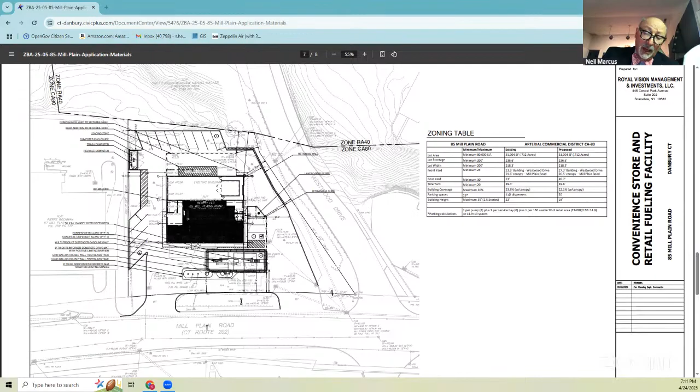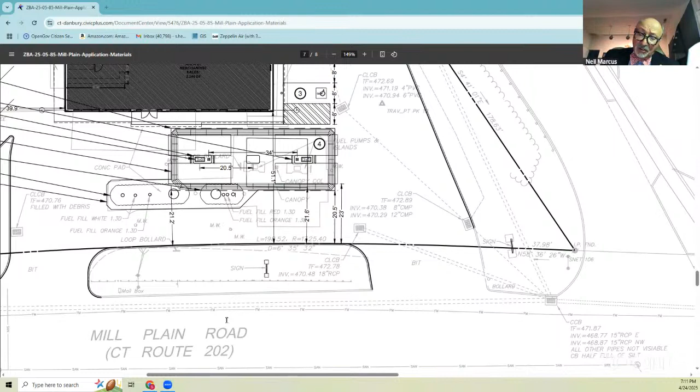So it's non-conforming. The new canopy will be 20.5. But the reason the new canopy will be slightly closer to the front yard is that the expanded canopy will cover the containment grooves. Containment grooves are installed today, and they didn't exist when that island was originally constructed. But the containment grooves are part of the new fuel vending island, and they protect the environment from any leakage from the pumps.

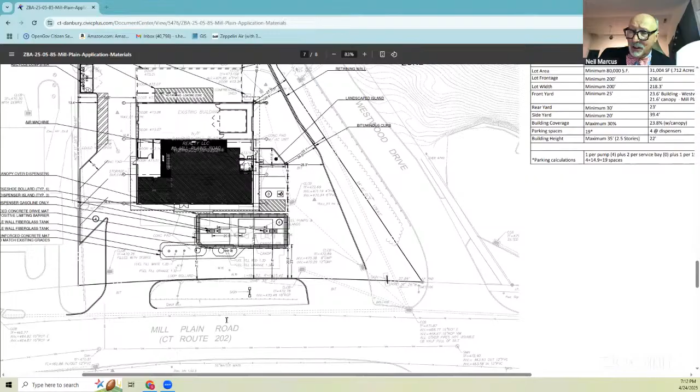So basically, if you're pumping fuel and you have a spill out of your tank because you didn't shut it off, or the automatic shutoff didn't go off, whatever, you had a spill, the gasoline today would run over the pad and out towards the street. It wouldn't be contained at all.

The modern new installation will have containment grooves, and these are only effective if you cover them from the rain. In order to protect the environment, remember in the Class 2 watershed for Kenosia, we have to upgrade to the most environmentally efficient vending island. We want to put in these containment grooves, but they're ineffective if we don't extend the canopy over them. So the reason the canopy is going to be 20.5 feet instead of 21.6 feet is to allow us to cover the containment grooves.

That's an increase in the current nonconformity by 1.1 feet, but it's done for purposes of making the site more conforming in the environmentally sensitive area. So on one hand, we're picking up 1.1 feet more on the variance than is currently required, but on the other hand, we're putting in an environmental feature that doesn't exist and should, because it's in the watershed protection area. So that's the first variance.

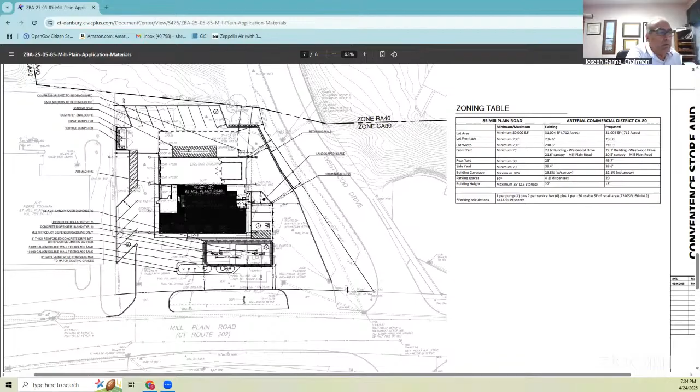Okay. Any other questions from the board? Yes, Mr. Marcus, I have a question. The retaining wall opposite of Mill Plain Road, that's a pretty steep slope. How high do you think you have to go?

With that retaining wall that runs parallel to Westwood - no, gotta be the west - opposite Mill Plain Road, where all the parking is in the back of the gas station. Hang on a second. Because I know that hill gets a lot of water, and I was wondering how you're going to manage it. And I know it has to be.

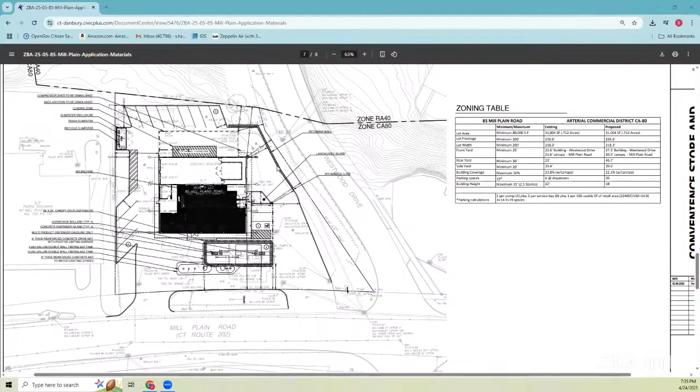It seems like a big deal, and I see that your closest parking spot to the line there is pretty close. Which parking area are you looking at? Opposite Mill Plain Road, the other side of the property. Okay, so there are 9 parking spaces along the north side. Correct. And those will need a retaining wall, am I correct? No. Where's our engineer?

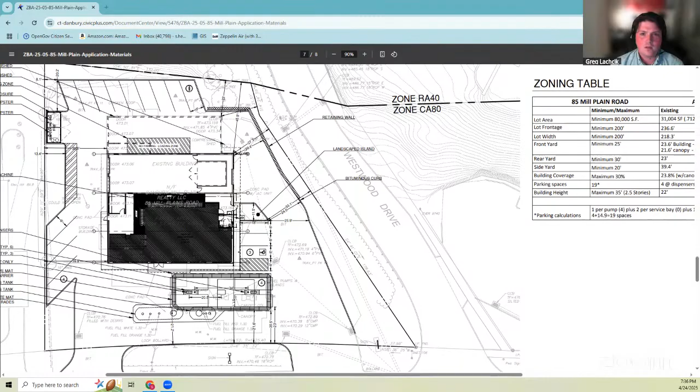Greg, what do you think? Yes. Hi, my name is Greg Lachcik. I work for Alfred Benesch and Company, and I'm representing our client, Sammy Jamal. If you allow me to share my screen, I can pull up a grading and drainage plan which shows the elevations right here. Okay, can everybody see this? Not yet. And it'll come - yeah.

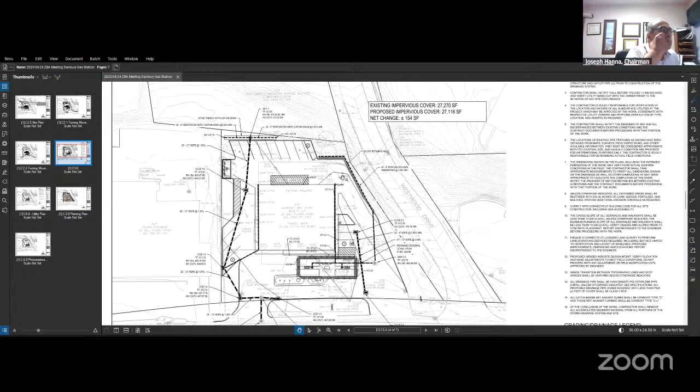Okay, so right here we're at about elevation 474, and our closest elevation to the wall is going to be about 482. So the retaining wall will be about 8 feet tall at its highest point in this corner.

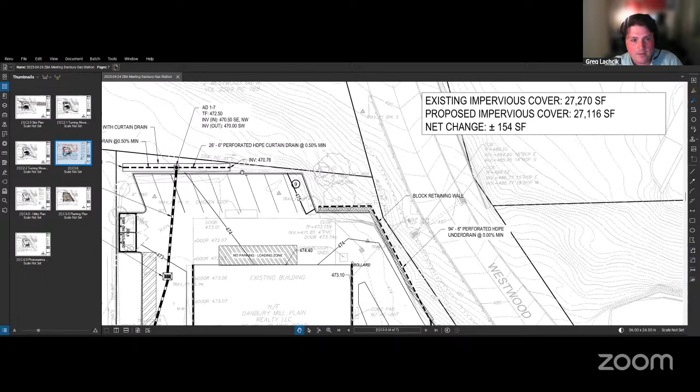The existing grade will slope down into the corner here, and there will be no retaining wall required on the back side of the property, on the northern side. We will also be demolishing the existing retaining wall located approximately in the same location abutting Westwood Drive, and it'll be extended further up on the northeast corner of the property.

We will also be including an under drain, which we are not sure is currently existing, that will help with any drainage issues associated with the wall. Additionally, all retaining walls constructed in the state of Connecticut need to be signed off by a licensed structural engineer, which will be provided prior to construction.

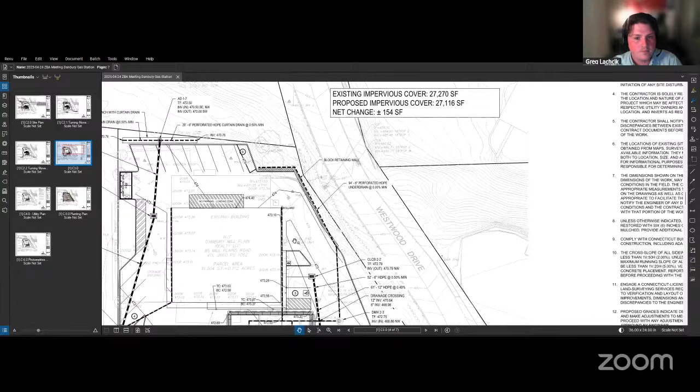Thank you, Greg. But are you saying that behind all of those 9 parking spots, there's no need for any kind of drainage or wall, or is that what I'm looking at there?

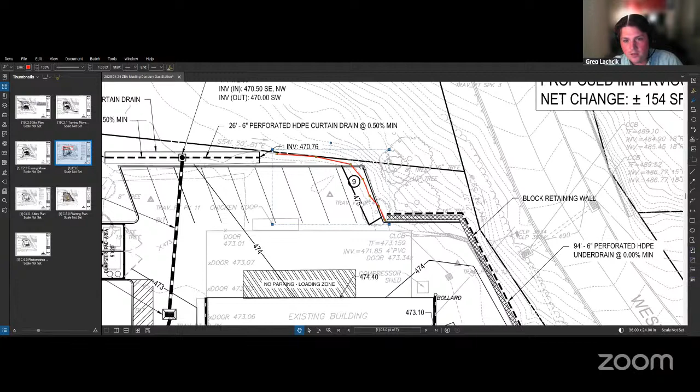A curtain drain? Correct. So this bold line here, that is our 475 contour, and our new 475 contour will be here, leaving this corner at approximately 475.25, which will allow us to not require any retaining wall there—potentially a 1-foot curb instead of a 6-inch curb. All those details will be ironed out prior to construction, but there will be no formal retaining wall around this back edge.

All right, thanks for your clarification. No problem.

Okay, any other questions? I have a few questions to follow up on the parking there. So with the new contour line, we're basically saying that it's borderline into that parking spot, about 90% it looks like.

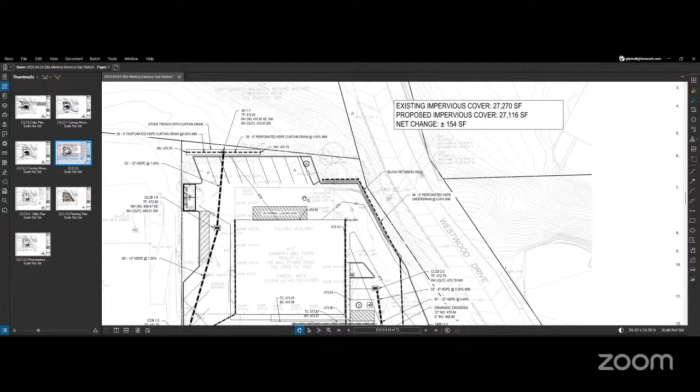I don't know, I would have to look into the regulations and maybe Sean can opine on this. Would eliminating that parking spot just be a little bit safer instead of taking the risk and adding that parking spot there?

There should be no risk to safety or slope stability that this parking space incurs. If we need to, we can provide some kind of geotextile slope stabilization. I don't see any issue why we would need to remove this parking space, as we're essentially matching the existing grade at the top of the curb at the corner in this location.

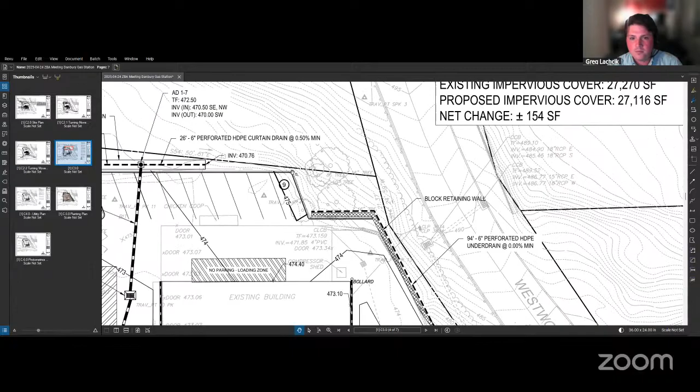And then I have a few more questions for Mr. Marcus. Yes, sir. With you asking here for 7 variances, I understand the need for—you're making this a lot less non-conforming than what it is now.

One of my biggest concerns is the two-way traffic you're requesting for that variance on the 24-foot driveway where it narrows down to 20 feet, with the Mill Plain Road traffic we currently get, and there being a stoplight at the intersection of Westwood and Mill Plain.

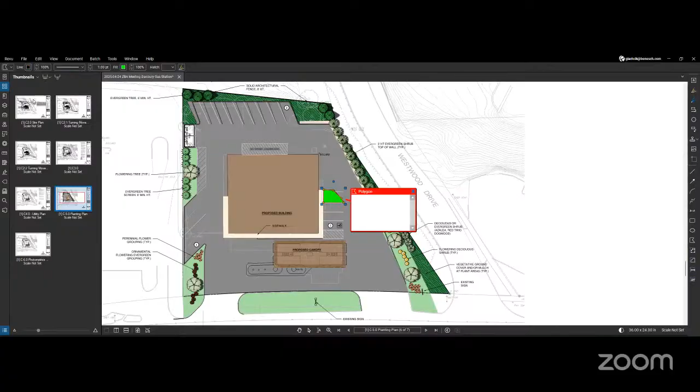My opinion is I believe it's more conducive if we make this a one-way property or site than the two-way. Even looking at the site plan, the way it's drawn up, it makes it more conducive and aligns it to a more one-way traffic type of flow on the property.

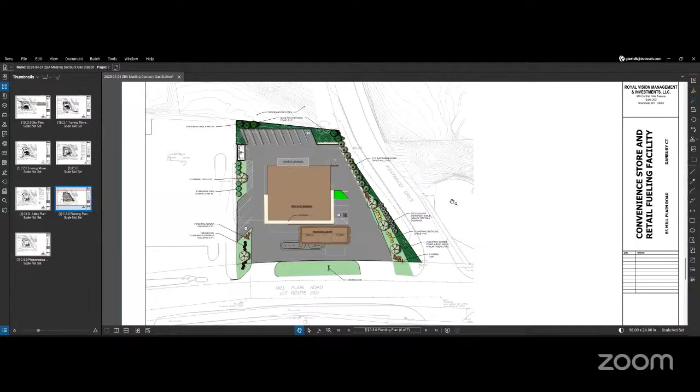As I see, the parking spots are kind of on a diagonal lineup, a 40, 45-degree angle. With the traffic that amounts, my fear for safety, concern, and welfare of the public—people will try to enter at that westerly side entrance with the stoplight there. Now you're having cars trying to enter on both sides of the driveway, making it a more dangerous intersection as far as entering in and out of the property.

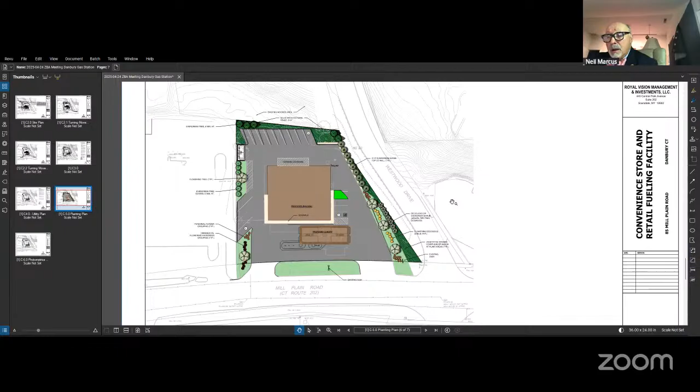I think it's more conducive if the traffic flowing westerly on Mill Plain Road enters the property and is able to then exit, creating less traffic and hassle and less likely causing any sort of accident to the property.

Well, this is a state highway. Route 202 is a state highway, and we have a city traffic engineer. I appreciate all your comments, but don't you think those guys ought to be the ones to determine whether that's an issue?

I mean, quite honestly, you could feel that way, and I'm not questioning your feelings and your logic, but I would prefer not to have the zoning board of appeals make this determination, because when we get to the planning commission, the city traffic engineer, and the state highway for a curb cut, they may not share that view.

They do strange things. So I understand what you're saying, and I will make sure that when this is in front of the planning commission, we share that comment from you, from the ZBA. But I'm not sure I want to do it where the ZBA decides the traffic flow.

I mean, because there's too many things that are going to happen afterwards, and I really don't want to come back later with a whole new variance application because I got a condition that either the state DOT doesn't sign off on, or our own traffic engineer.

So I hear what you're saying, but I wouldn't want to do it because, quite honestly, this is a decision for other people who have the expertise that I don't have, and I would defer to them.

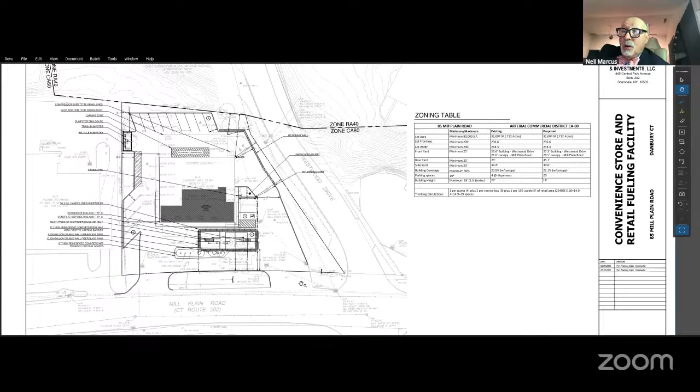So I understand your thought, but quite honestly, a delivery truck is going to come in to deliver on the west end driveway, because we have a loading zone up there, and go out on the east side. So the delivery truck is likely to use the two-way driveway.

And again, at 20 feet in width, we have roads in Danbury that aren't 20 feet wide. So a 20-foot driveway is significant. I don't know if that's a problem.

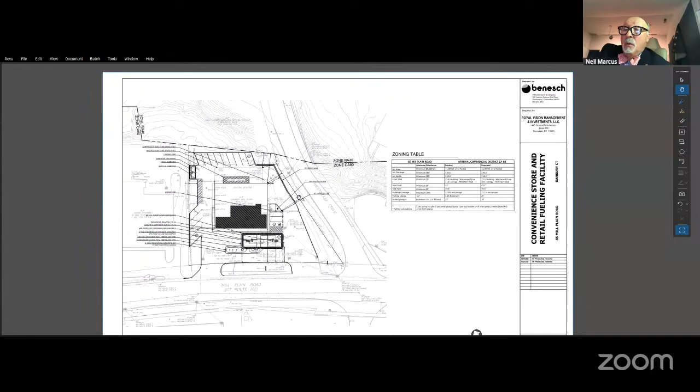Your question is, will the state allow both driveways to be in and out? No, that's not my question. My concern is the high likelihood of it causing more accidents to the site or the area.

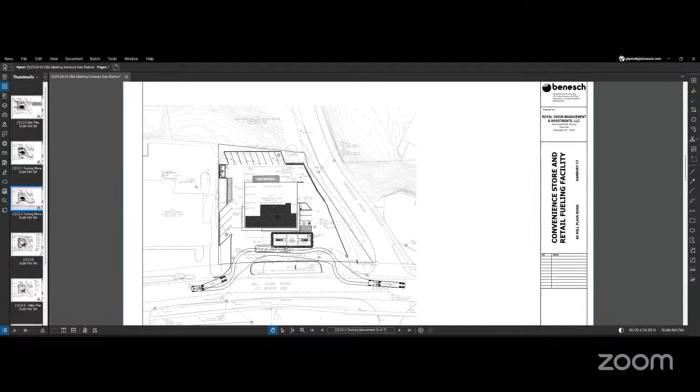And I understand the city engineers and state experts are getting involved, but you're coming in front of us as the ZBA, and I know they may deny it or approve it, but coming to us, we're held at a position and a title to make sure that one of the things we do is look out for the welfare and safety of the public.

And you know, we vote on this variance, and once we vote on it, whether it gets approved or it doesn't, it stays with the property, it stays with the land.

I understand what you're saying, that there are safety measures in place to prevent something like that happening. But once we give it the blessing, if we approve it, and it ends up failing down the road with these experts, this variance stays with the land.

That's correct, therefore somebody else can come in and make it more non-conforming, or make it less non-conforming. And then here we are with the same incident or situation that I'm speaking on now.

Well, your variance, when granted, is usually per plan submitted. So it's this plan you're approving, not some future plan. I would disagree with you, Mr. Marcus, on that, because the only thing we're doing is eliminating a lot of nonconformities based on this plan.

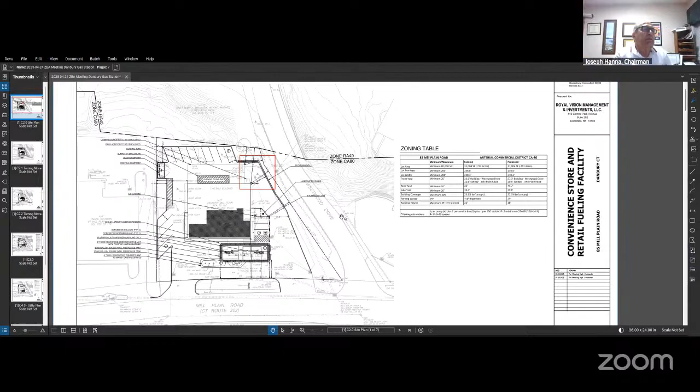I understand, but unfortunately, we're here first. That's true, but you're only giving the variances. You're just the first step. This has to go through planning, the city engineer, and we'll raise that issue.

We'll say that actually you can put it on a motion. If you gave us a variance, you could put with an advisory that this issue here needs to be looked at further by the city, by the engineer.

That's fine. We're just gonna vote, we're just gonna approve the setback lines. The rest is gonna be other city department's job to approve this.

Juan's 100% correct, because if it does get through, it's there forever. Now, if the traffic commission comes in and says no, you can't do both ways, it's not safe, the variance is still there. So why not wait till after for that particular variance?

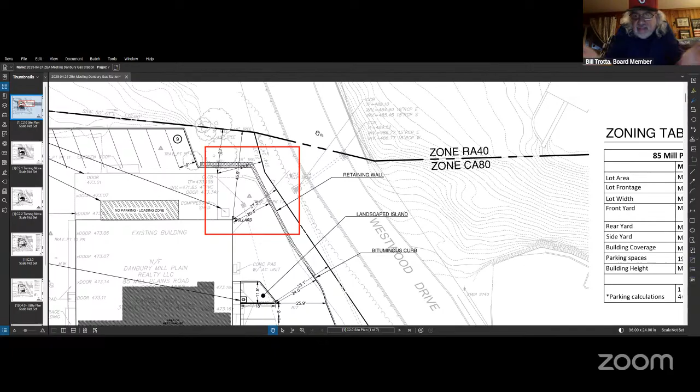I mean, the others we can talk about, but for that particular one, why not wait till you get the traffic inspection, and then they approve it, and then you say, okay, come back, here we go, variance, boom, you got it. That's simple, that makes sense, that's common sense. Attorney Marcus, has the DOT commented on that at all yet? No, we haven't been there. You're the first place, and it's taken us 8 months to get to you.

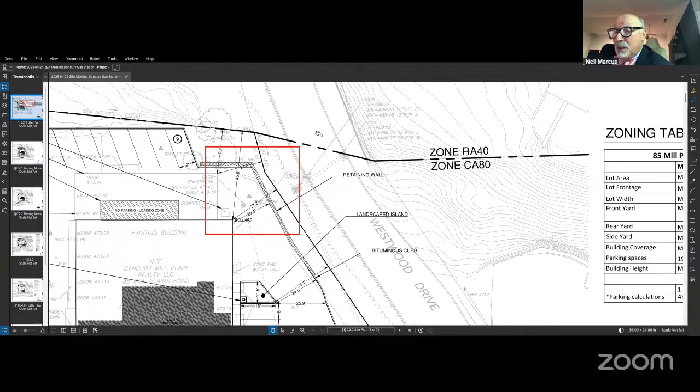Quite honestly, this has been very... And by the way, the fact that the planning department has looked at this and had no issue with it sort of belies - I've got Juan saying it should be one way, but actually we've met with the planning department and they had no problem with this driveway setup. So, what about a traffic study? What about the traffic study to see how it goes?

It's simple, it's easy, do it and then come back and get it done. So you want us to come back to you, make this a one-way driveway until we do a traffic study? You guys want to see the traffic study and then give us a variance to make it two ways at that corner? No, that depends on what they say. If they come in and say no, you can't do two ways, or if they say two ways is fine, then there's no problem, there's no issue. If they say no, you can't do two ways there, and we've granted a variance, it's already locked in.

No, Bill, you're wrong. If you say we can do it and they say no, it doesn't get done. They are the final - traffic is not in the ZBA's parameter. So as I said, I don't disagree with you guys, argue it, but the fact of the matter is, I'd just rather have the right department do it.

The driveway, it's used as it is now. So do it - we only vote on that 1.5 foot or 3 foot, whatever it is, instead of making that driveway a little bigger. And the rest of it is all engineering and whenever the planning can allow that to happen. So you guys should concentrate on providing on the setback line.

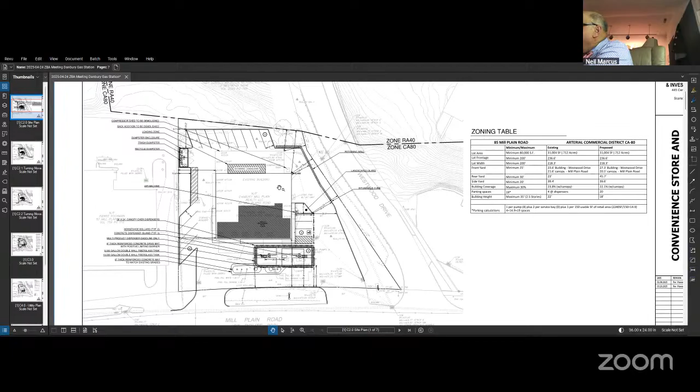So Juan, just again, if you look at the site plan, the requirement is to be 20. The requirement for the driveway there is to be at 24 feet. So that, again, we've got it's a 3.6 foot variance. The proposed retaining wall is only 20.4 feet. And we need - so it's beyond the handicapped, it's at the farthest corner of the building, the farthest corner. The retaining wall there is 20.4 feet, and we need 3.5 more feet.

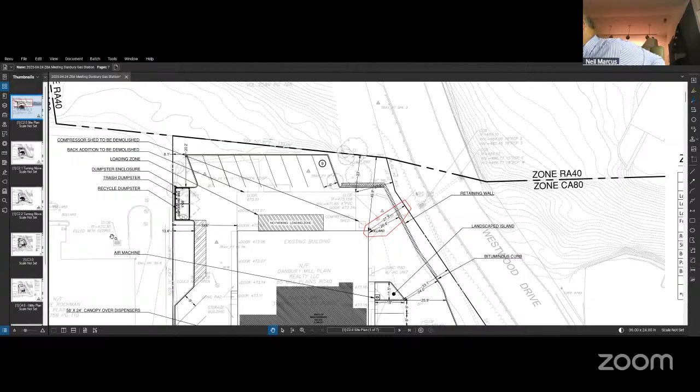So if you're saying that it makes sense to put a notch in the retaining wall, then I guess we'd have to just put a notch in the retaining wall. But that's the 3.5 feet there. It would be an odd retaining wall - it would be straight, you'd have a curvature out there, so you could get a distance of another 3.5 feet. And that's all we're asking about. So, if you're saying that we can't have that variance, then we're going to have to either make that a one-way driveway, or we got to put a notch in here. So if that's something that you guys can do, that I'm fine with that.

This goes, for me, it goes beyond just the traffic as well. That's supposed to be a proposed loading zone. You got an 18-wheeler that sits back there. You got a bollard at the corner of the property.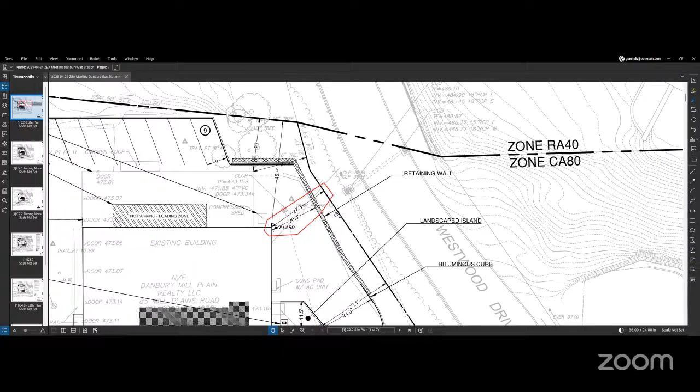Let's say you get the two-way traffic, the variance, and everything gets approved, and you got traffic now going both ways. You got an 18-wheeler sitting there with a bollard at the corner of the lot, and I get it, it's 5 feet. But you got cars, people coming in and out of gas stations, some drive responsibly, others drive erratically. You got a tractor trailer sitting there in that loading zone. You got somebody coming in from the easterly Mill Plain roadside, somebody coming down the other end to get out through the westerly side, and we have an accident. Or somebody's trying to get to their car at the rear of the property and they get hit by a car.

So your problem is that it's the 3.5 feet, so your problem is with section... I gotta get the right section, with the two driveways, 8B1B4. Yeah, it's item number 6. And you'd say, take that variance out and you're pretty good with the rest of it.

So, I think that you are making it less non-conforming, and okay. Part of our committee is to make things that are non-conforming less non-conforming, and I'm okay with that.

So basically, the applicant would then either make that a one-way driveway at that corner, or they have to lop off a corner of the building or put a bow in the retaining wall.

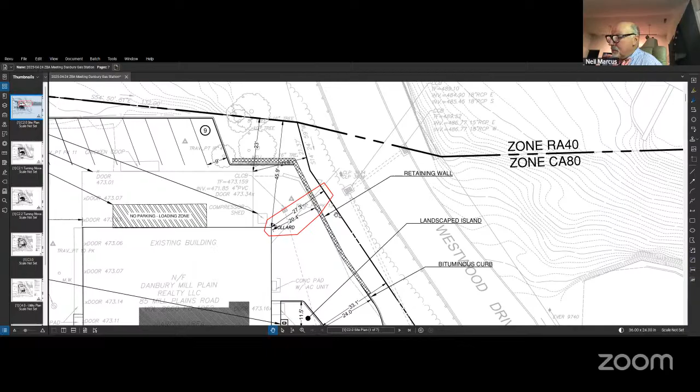Anyone else have a question from the board? Yeah, no, I'm okay with that, Attorney Marcus. And I agree, it shouldn't have to be left in our hands. Anyone else have a question?

Okay, anyone from the public support this application? Anyone in support of this application? Anyone in opposition to this application? Anyone in opposition to this application? Okay.

Make a motion to close 25-05. Anyone? Well, before we close it, so as a board, and with what Mr. Marcus has explained, are we gonna want to continue, or are we gonna close it and then decide within ourselves?

Well, this is a little complicated here. If you're just gonna vote on one variance and leave the other one out, I don't know how you're gonna word it. If Mr. Marcus would like to discuss it with the city engineering first about the driveway and then come back to us, or honestly, could we deny it without prejudice, or shelve it, just that one variance? No, no.

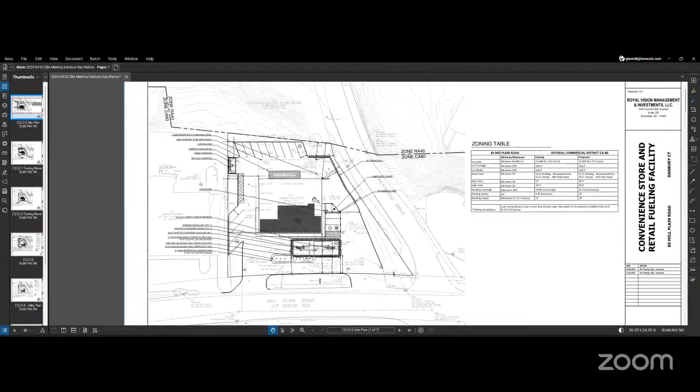Can we have Peter, Sean, if I can answer that question, it'll be months before this thing gets reviewed, you can't hold the public hearing open for the traffic engineer. I'm saying we will withdraw the request for a variance to 8B1B4. Okay, yeah, that's the easiest way to do it. And we'll either live with it the way it is, one way, or we'll come back after, but that will be back to you six months from now.

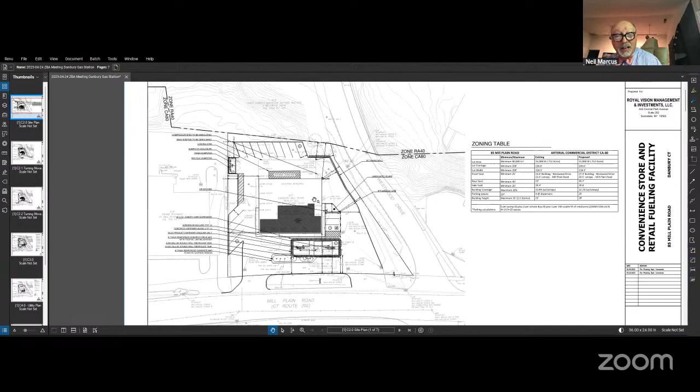Because you think the site plan and special exception move that quickly? It doesn't, it's three months just to get it to a public hearing. So I would ask for that, because otherwise we can't go to the next step without your approval. So if they're gonna vote on it now, you have to really...

They're gonna approve the, what do you call it, the motion would be to approve the variances requested with the exception of the variance to section 8B1B4, which is denied. And that's fine. Or you could even say, Attorney Marcus through the chair, the voluntary withdrawal, it's removal. I'll withdraw it, I will withdraw it. Better, Sean, that's a better way to do it. You can say that on the record, but no variance to 8B1B4 because it's been withdrawn. That makes sense. Okay, thank you.

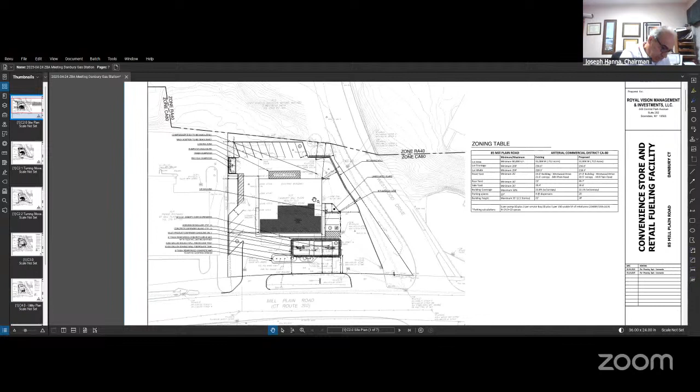All right, Mr. Chairman, I'd like to make a motion to close application 25-05 from public hearing. Motion made by Mr. Rivas, seconded by Mr. Trata. All in favor? Aye, aye, aye. Okay.

You gonna vote on it now, or wait for the second one? Well, Mr. Chairman, I'd like to make a motion to open application 25-05, 85 Mill Plain Road, Danbury, Mill Plain Realty LLC for voting session. Motion made by Mr. Rivas, seconded by Mr. DeLucia. All in favor? Aye, aye. Okay.

Anyone volunteering for a motion now? I can make the motion, Mr. Chairman. Mr. Chairman, I'd like to make a motion to approve 85 Mill Plain.

85 Mill Plain Road, Danbury, Mill Plain Realty LLC, Marcus Neil Esquire Agent, CA 80 Zone. Section 5B3A, reduce front yard setback from 25 feet to 20.5 feet for canopy. Section 5H1B, reduce landscape perimeter planting strip for front lot lines from 20 feet to 0 feet. Section 5H1C, reduce residential buffer planting strip for side yard from 20 feet to 0 feet. Section 5H2, allow 2 parking spaces in required front yard.

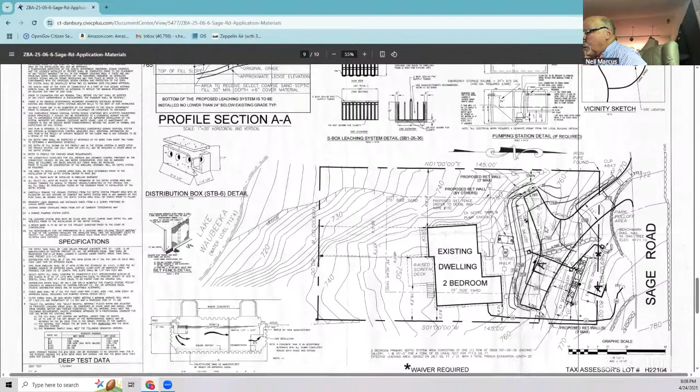Right now, like a lot of the old houses up in Lake Waubeeka, parking is on the road. Years ago these were built as summer bungalows, 70 years ago, and people didn't have cars, or if they did, they were only up there in the summer and weekends. Now it's a year-round community—you've got snow to deal with and passage on the road. The association encourages anyone who can to get their parking off the road and onto their site, but the way these sites are shaped, they're all undersized. Very few are 20,000 square feet in the RE20 zone, so you've got undersized sites where the slope is either up or down.

If you knew the history of Lake Waubeeka—on the old Danbury maps from the 1800s into the early 1900s, this was called Moses Mountain. Nothing to do with the Moses in the Bible, but the Moses family owned this mountain years ago. Old-time Danburyans might remember they had a grocery store on the south end of Main Street near Rogers Park, the Moses brothers. Anyway, this was a mountain, with a lot of ledge, rock, and grade, and all these sites in Waubeeka, this one in particular, suffer from that.

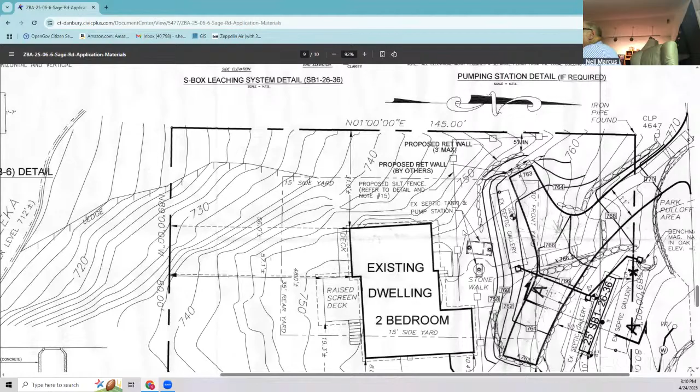If you look at the back of the property, the house borders the lake, which is at 712 feet above sea level. The back of the house is about 750 feet, so from the back of the house down to the lake, you've got over 40 feet of grade. There's no way you could ever move the septic system back there—because of the ledge, and also because you wouldn't want to, since septic needs time to travel underground, and you want it further from the lake, not closer.

So we're going to leave the septic up on the side of the lot, where it exists today, and ask for this very small variance to allow us to park cars in the triangle inside the Y of the new driveway. Other than that, she's got an existing non-conforming footprint, and she's going to use it. There's no change—we're not asking for any new side yard variances. The side yard to the east is very close, but it's been that way since the house was built, and it'll continue to be that way. The only variance is for parking cars.

That seems almost too simple after the last application, but that's it. Ralph is here if you've got any questions—though we're past his bedtime, so ask him. My client, Maureen Tendler, is also here and she'll answer any questions you might have. But it's a really straightforward application.

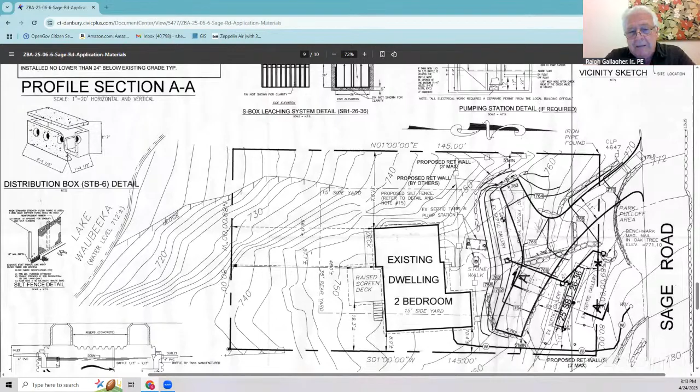Okay, that was my only question. Anyone else have a question from the board? I have two questions, Mr. Chairman. Okay, Mr. Gallagher, yes.

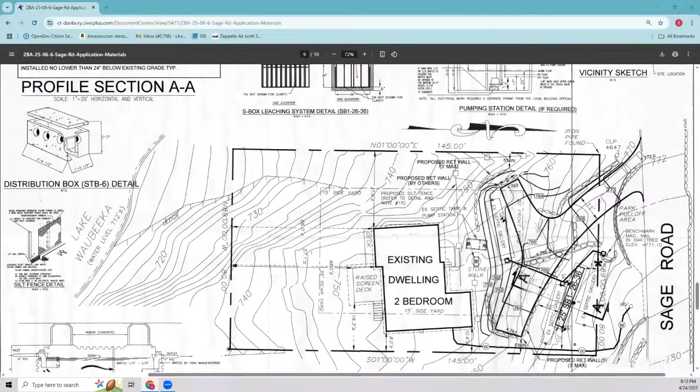I'm looking at the site plan, the nomenclature here of the site plan. On the northeasterly side, it looks like that part of the driveway crosses between both septic galleries. Correct.

Is that going to be an issue in the construction? No, because we're going to fill in those areas, not cutting the soil away. Oh okay, so you're filling. Correct, we're filling. If we get close, we would put some select septic fill and then driveway fill over that. We would never try to do any hydraulic block on the downward sloping of the septic. So that's it, and my second question.

I'm sure maintaining the 12% grade here would help a little bit. But then on the northwesterly side, as it takes the second turn there on the Y, what are we doing, because I visited the site today, there is some ledge, a lot of ledge there, and it slopes drastically towards that southeasterly neighbor. What are we going to do with water retention? Southwesterly neighbor, you mean? Yes.

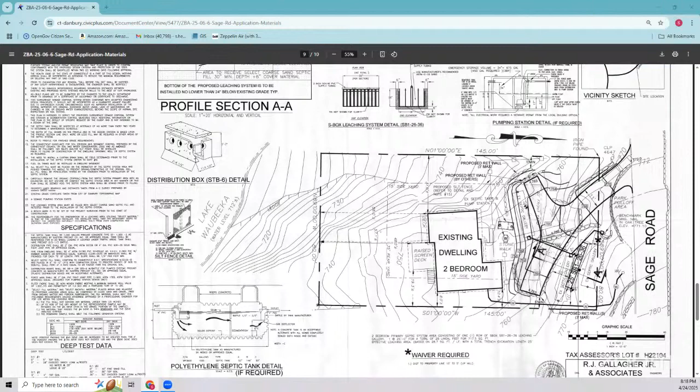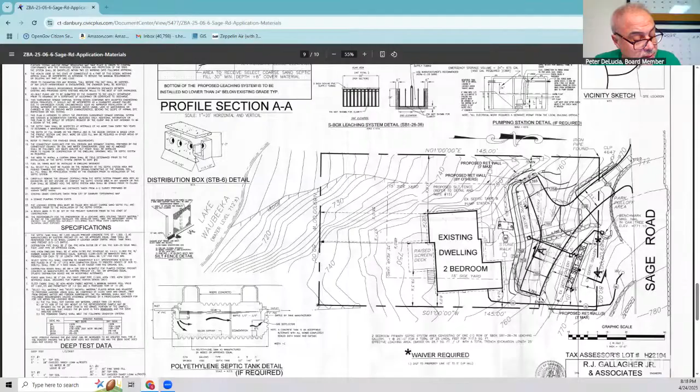Let's see now, who's going to volunteer the good work? I make a motion to approve 25-06, 6 Sage Road, Tendler, Marlene R, H22104, RA20 zone, section 4GI and section 8CI.C2, to allow parking in a required front yard of a single family dwelling per plan submitted. Motion made by Mr. DeLucia, seconded by Mr. Trotta. Okay, all in favor? Aye. Aye. Thank you, thank you.

Okay, continuation of public hearing, 25-04. We've got Mr. Marcus again now.

Well, actually, I'm going to defer a lot to Mr. Virbickas, because he's the guy who filed it. You're just going to let us watch the movie tonight. Attorney Marcus, Moses Brothers must have been around the Civil War era. Oh, come on, the Moses brothers were there when I was a kid. How about the meat market, right? Yeah, remember down, yeah. And you had to remember the Rogers Park Pharmacy. Oh yeah, yeah.

Okay, for the record, Neil Marcus, Cohen and Wolf, PC, and I'm joined by Dainius Virbickas from Artel Engineering.

The continued public hearing was to resolve the issue of the driveway, because the current driveway is excessive. The proposal was to put in a new driveway with a garage and parking area, but that driveway was above the 12% grade required by our current regulations. The pre-existing driveway could have stayed as it was, but the commission felt that if we're going to put in a new driveway, it had to meet the current standard of 12%.

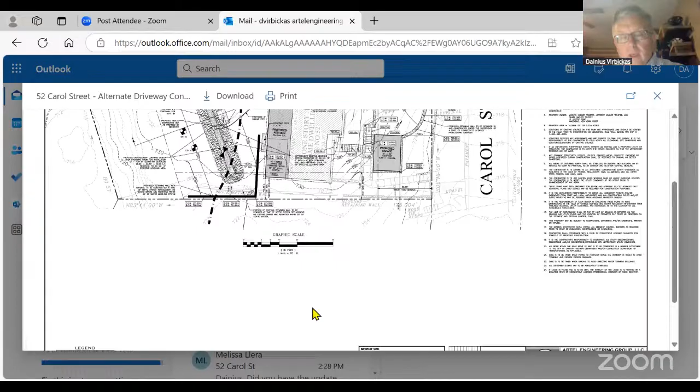Now I'm going to concentrate our look on this portion of the driveway. As you may recall from our previous iteration, the existing driveway swoops up and brushes right against the house, and for the most part is in excess of 20 to 25% in grade. In our initial submission, we figured we'd reduce it to about 16%, which still exceeded the driveway regulations, but was a little better.

Sean said this looks great, but make it 12%. So the right hand gave and the left hand took away. We went back to the office, sharpened our pencil, and created this drawing, which now puts our driveway at a grade that does not exceed 12%. The shape of the driveway is still the same. We still propose to include a garage out in front and the ability to park a vehicle out in front of the garage if need be.

This is especially important during the winter months, when people at Lake Waubeeka are told to move their vehicles from the frontage, where a lot of cars end up parked year-round, all the way to the beach area, and homeowners need to hoof it back to the house. But again, this driveway is now compliant with the 12% limit, and we did flatten it out a bit, to about 5%, as we enter the garage.

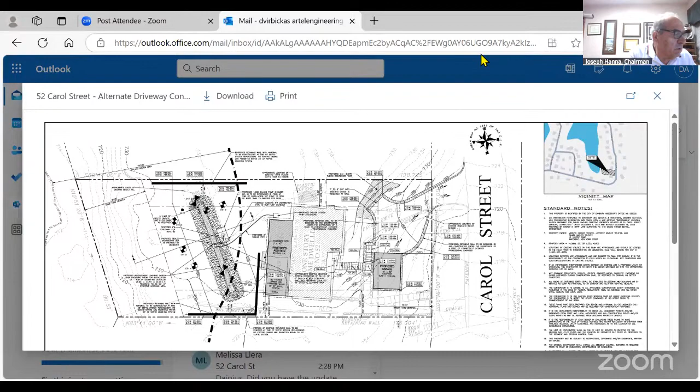Have a motion to close 25-04. Mr. Chairman, I'd like to make a motion to close application 25-04, 52 Carol Street, from public hearing. Second. Motion made by Mr. Rivas, seconded by Mr. Trata. All in favor? Aye.

Okay, Pete, you got beat out. Yeah, I lost a step. All right, that was very easy. Okay, all right, let's see now. Who's gonna make the motion for open and discussion and voting or whatever?

I make a motion to approve 25-04, 52 Carol Street, Nadler, Maryland, and Jeffrey, Artel Engineering Group LLC, agent, RA 20 zone, section 483, reduced southern side yard setback from 15 feet to 10.1 feet, and reduced front yard setback from 30 feet to 16.9. Section 4G, allow parking in required front yard. Section 3G, allow detached accessory in front yard. Section 3GD, allow detached, front yard.